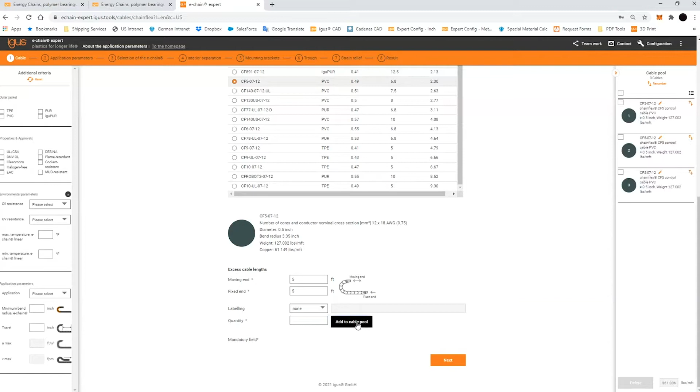So it will also ask me what the excess cable lengths are coming out of the moving end and the fixed end. So I'll say I have 5 feet coming out of each end, no special labeling, and I'll say that I have 3 of those cables, and I'll add them to the cable pool, and they'll populate over here. The next option is to select the chain flex cable if I don't know the Igus part number, but I know the electrical details I need.

So for example, I can come down here, and let's say that I need a 4 conductor by 10 gauge. So I'll click that, and it will populate a number of different Igus cables that we can use for this electrical configuration, 4 by 10 gauge. So I can pick the CF130 series, CF130 US, 140 US, CF9, CF9 UL. And it will give me some details about these different cables in terms of their bend radius factor, their diameter, their jacket material, and their price in terms of dollars per foot.

So I'm going to select a CF9. I have the same inputs here for 5 feet, 5 feet. And let's say that I have 2 of those. And I'll add those to the cable pool. The next option would be what Igus calls a ready cable, and that is a pre-connectorized cable assembly. We offer these harnessed according to a number of different drive manufacturers' standards. So we have some options here: Allen Bradley, Fanuc, Festo, Heidenhain, Siemens, a number of different manufacturers.

So for example, let's pick Siemens, and we can select from a variety of different manufacturer part numbers. So we can cross essentially any of these Siemens cable part numbers. So we'll select one here. It'll give us a little bit of detail about it: the number of cores, cross section, diameter. We have the same option here for the breakout. So we'll say 5 feet, 5 feet. It'll ask us which type of connector is desired at which end.

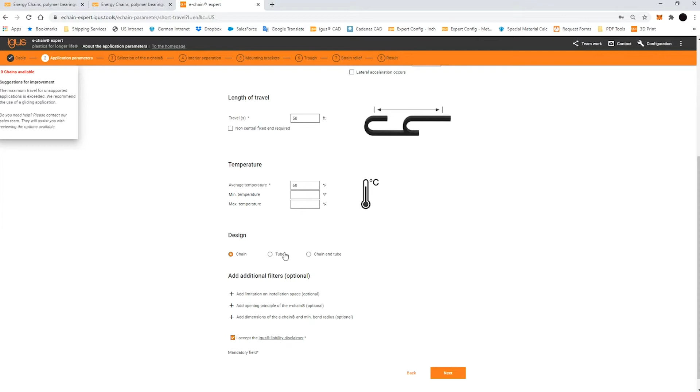And then it will ask us if we want a chain, a tube, or if we want to browse both chain and tube. So a chain refers to an open style energy chain with crossbars. A tube refers to an enclosed energy chain with lids. So if you have something that has hot chips, debris, things that you want to protect the cables from, you can select tube. Or if you want to browse both chain and tube, you can select that. For now, we're going to leave it with chain.

There's also some additional filters here that you can choose to use if you like, that will allow you to put in space restrictions. So if you have an application where you have to fit all of the cables in a chain that is, say, 6 inches wide, you can put in a 6-inch restriction for this B dimension here, and it will restrict the system to chains that are only 6 inches wide.

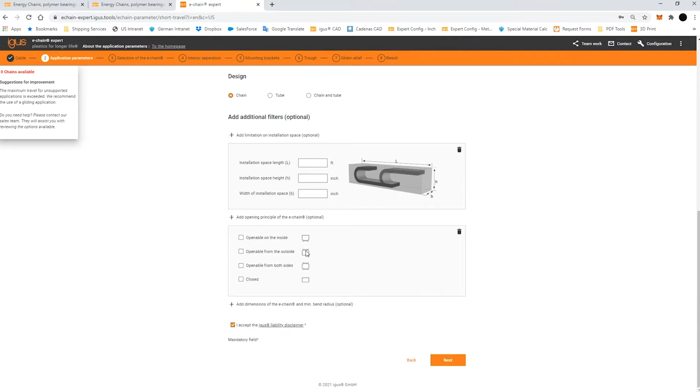You have an option here if you have a desired opening principle of the E-chain. So if you want it to open on the inside radius, the outside radius, both sides, or if you want it to be fully enclosed. And then you can also add dimensions for the E-chain itself. And these will essentially all serve to restrict the selections to just what you've selected dimensionally. I'm not going to use any of those for this example, but they're also there if you like.

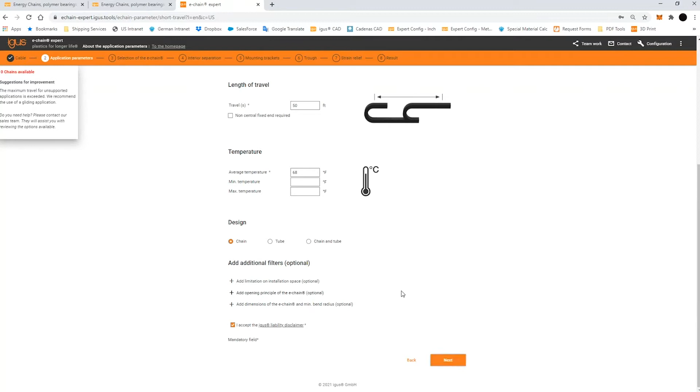So we're now good to proceed to the next option, and that just gave me an error because I was still on unsupported and not on the gliding chain. So I need to make sure I have gliding chain selected, and I should be able to move to the next step. And it will now give me a number of different energy chains that I can use for this particular application, and it will give them to me in order of size and cost.

So the smallest energy chain that we would consider recommended for this application would be the 2700 series, and it has the lowest price on the list of around $20.53 per foot. This will give us options all the way up to our largest chain, our 800 series, which has a 9-inch interior height at nearly $300 a foot. That's a far larger chain than necessary for this application, but it will essentially allow you to choose from increasingly larger chains and just cap off a minimum size. It's the smallest that we would recommend that would work for this application.

And it will also give us options down here for the service life that we would expect out of this E-chain system. So we see a number of different options here for both bending radius and interior width, interior height, and some different service life calculations in the neighborhood of 2.7 to 3 million strokes.

Now it will give me a chain service life right here. As of right now, it's not giving me a total system service life. The system service life refers to E-chain and cables, and the reason why it's not giving me a total system service life is because in step 1 I had a non-Igus hose, that pneumatic hose that I had added to the cable pool. We don't theoretically know the manufacturer's recommended lifetime on that because it's not an Igus cable.

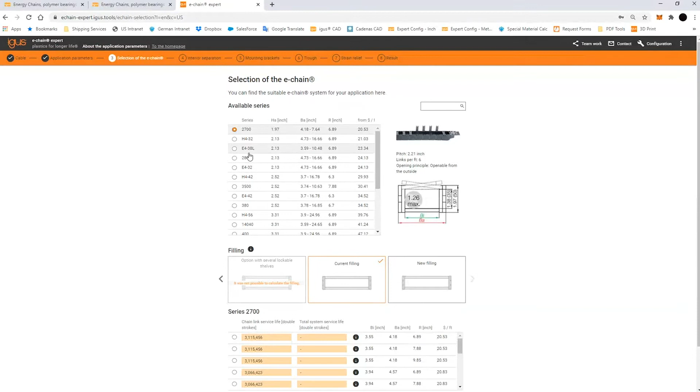But what I can do is I can also pick through, if say I see this 3 million, I say I want something with a slightly higher lifetime, I can start to go up to the next series. So let's say I want an H432 chain, we'll give it a moment, and it will populate with the values of H432. H432 is a heavier duty chain from our E4 product line. And you can see now in the E4 line, we now have a lifetime of around 9 million cycles.

So you can play with this and select different chains. I'm going to move forward with the E432. And you can see in this application, this has been able to determine an automatic cable fill for this particular cable package. So it's automatically populated us with separators. Sometimes, again, depending on the application parameters, it will give us an option with a shelf or several different configuration options that you can choose from. In this particular case, we have one automatically proposed option.

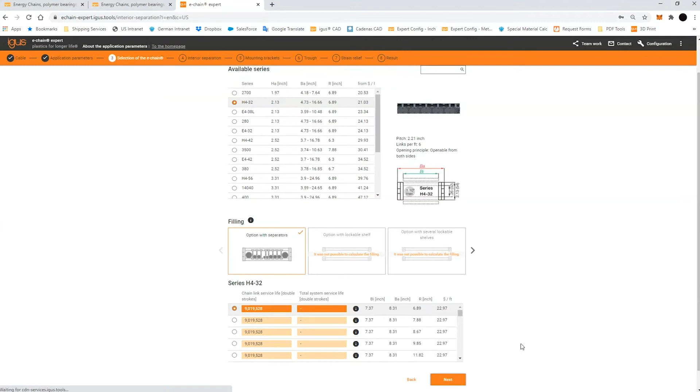And then you can also come over here, and if you say, I don't want it to be automatically filled, I want to position the cables myself, you can click the empty box and move to the next step. So I'm going to leave it on this option right now. I'll move to the next step, and you can see that it's automatically filled with all of the cables and hoses that are needed in here.

Now I do have the ability to change this if needed. If I say, hey, I don't really like the automatically prepared configuration, I need my encoder cables to be on this side of the chain, I'm able to pull things out of the chain and move them around. So I can move this encoder cable over to here, and I can come over here and grab another separator and click this and click. I can add that, grab another separator. I can use these arrows to move the cables around so that they're as close to their separator as possible.

Now you can see that the configurator does automatically include a little bit of clearance. You can see a little bit of white space between the separator and the cable. That's the Igus recommended clearance of 10% around the cable, so it will automatically calculate for that. And I can move things around as needed and hit the down arrow, pull everything down.

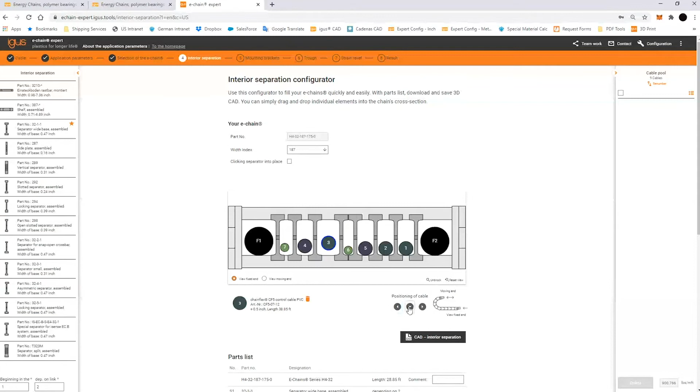If I also decide that, hey, I want to leave a little bit of spare space in here for future expansion, I can come over here and say, make my E-chain 212 millimeters instead of the 187 that it was, and I can change this width accordingly. I can move things around, I can create another compartment, and do whatever is needed to configure these cables and put them in a place where I'm happy with them.

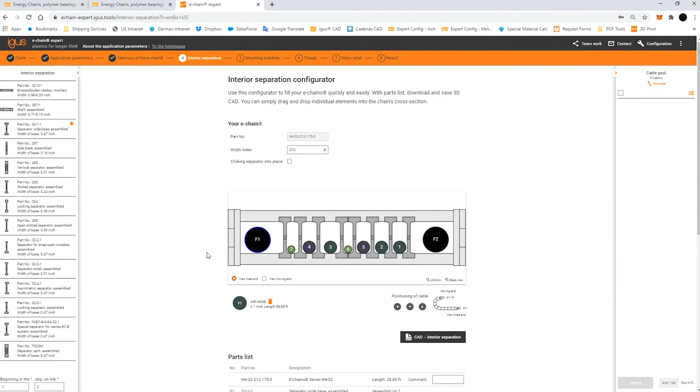So with that, once I'm happy with how the chain is configured and how the cables are placed in, there's an option here where I can kick out a CAD file of this interior separation, and I'll show that now. And there'll be another place to be able to do that further along in the tool, but I'll show it right now.

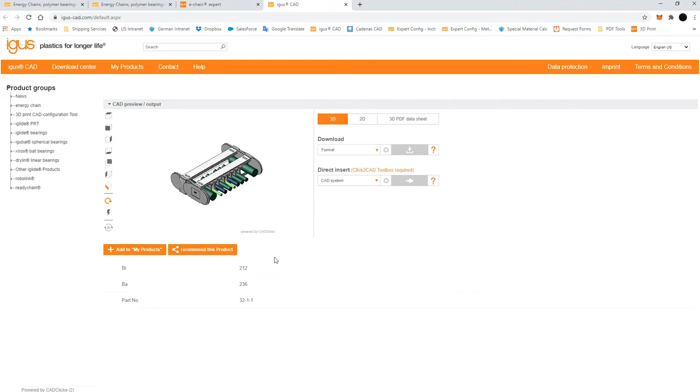It'll take a moment to load, but essentially what that will do is it'll give us a 3D file of a couple of links of the given energy chain and the cables inside of them. So that can be used to be populated into an engineering drawing or for reference of exactly what that link will look like. So as it loads here, this is essentially what the file will look like.

And you can look at it from the side, you can look at it from the corner. So essentially 2 links with the cables inside. You can download this STEP file, SolidWorks, whatever it is that you need to pull into your CAD program for drawings. So if we go back here, we're ready to move on to the next step in the configuration.

And that's going to be the mounting brackets. So this is our standard bracket set for this series. It's known as the KMA bracket style, and we offer that in a pivoting and locking configuration. So with this being a horizontal application, we recommend the pivoting brackets as indicated by the note here. The locking bracket is recommended for vertical travels, and that's indicated by that note. So this being horizontal, we'll leave it as pivoting.

And then we have an option to either include or not include a C profile, which is a metal profile rail that's integrated into the bracket that can be used for strain relief. We have a number of strain relief accessories that clip into this rail that can be used to secure the cables. So we'll go with the C profile. And the C profile can be installed in different places within the bracket.

So you can see I can click through these different configurations, and I can say I want the rails on the outside radius, I want it on the inside of the moving end, the outside of the fixed, and through the different configurations. And I can also say I want profile rails on both. So A2 is the most common configuration with the profile rail on the outside radius and the fixed end, and the inside radius and the moving end. So that's what we're going to leave it at for this example, and then I can move on.

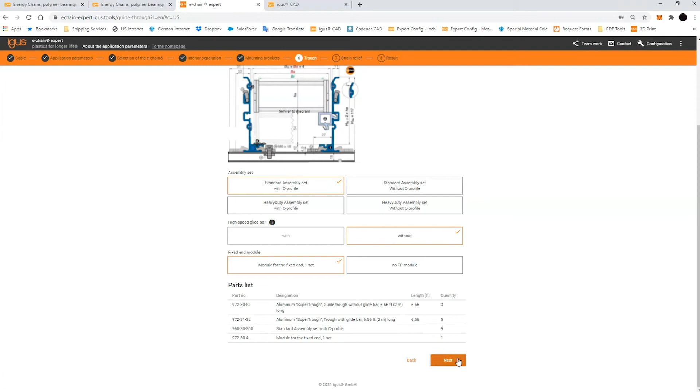And now the final step in this process is the strain relief selection. So as of right now, this is still being developed. In the future, this will be another configuration screen where you'll be able to drag and drop individual strain relief elements onto the cables that will be sized specifically for what they need. As of right now, that feature is not released yet.

It's still being developed. So this screen, as of right now, allows you to add strain relief components to your order, but it is not necessarily intelligent in selecting the strain relief components for the cable. So if you already know what strain relief components you like to use and need to add, you can add them from this list here. So we have some strain relief clamps, we have some tie wrap plates. So I'm just going to add a couple of tie wrap plates.

Let's say I need 4 of those. It'll give me a little picture of what it looks like, and I can add those to the list. Now, not overwhelmingly intelligent at the moment, but this will become something where we have a list that will show exactly what the parts and pieces are for each individual cable. As of right now, it's just an ability to add some additional parts to your shopping cart. And that will complete the configuration.

We can click next, and that will bring us to our final result. Now, assuming that all of the components that are needed in that system are within the Igus online library, it will kick out a price right there. And from this screen, you can directly add to a shopping cart or request a quotation from Igus. So click either one of these buttons. It will pull up a box to put in your information, email address, company name, and you can either order it directly or request a formal quotation or a discussion with an Igus representative.

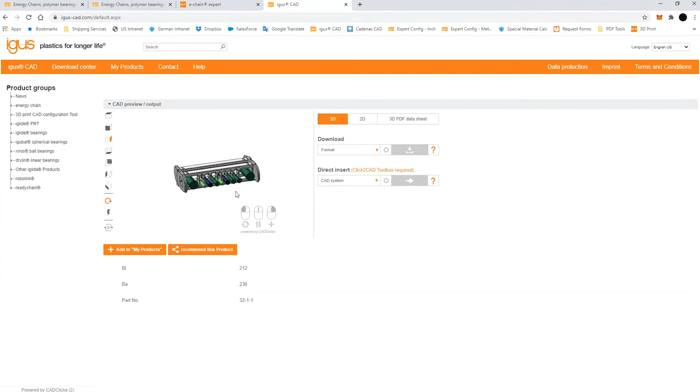We also have a couple of buttons down here that will allow you to request a sample of the chain. We have another 2 buttons for a CAD file here. So if I click this button, that will bring me right back to the same file I had shown previously. It's just another opportunity to generate this internal separation configuration. And then I can click CAD of the E-Chain itself, and this will give me the larger file of the overall E-Chain system. It will take a short moment to generate, but this will essentially be the entire gliding chain in the loop with its travel extremes.

So here we go. Now we have a 3D model that we can download of the chain and its gliding configuration. And for anyone who's familiar with the Igus CAD site, we have options here, and you can change certain attributes of this. You can change the positioning of it. You can add and remove brackets. You can do different things to manipulate the file as you need it to be.

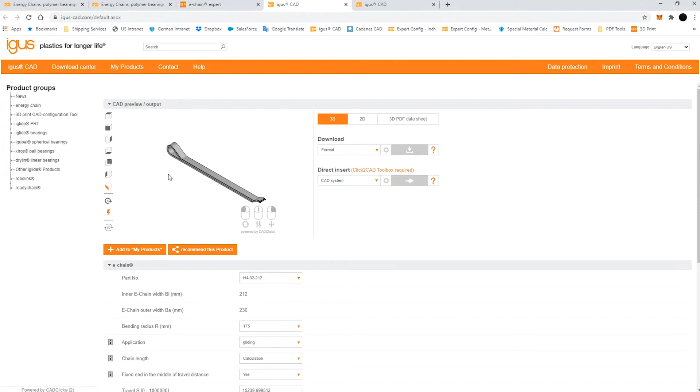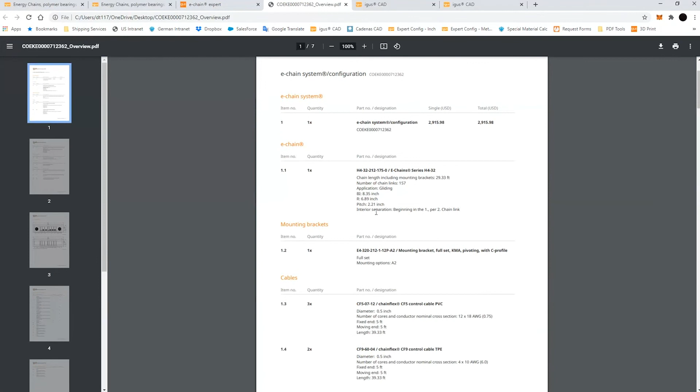If we go back over here, we have an option to download the configuration and parts list as a PDF file. So we'll click on that, and it will load momentarily, and it will bring up a dialog box to download a configuration. So if we save this and open it up, it will give us a PDF output of what we just did. So it will give us the parts list and a sketch of what it is that we configured. So this can also be used for documentation purposes and engineering submittal. This is another link to generate a similar drawing and parts list, just in a different format.

This option right here allows us to link to the Igus webpage for the given energy chain that we had selected. So we had selected the H4-32, so we can read more about it, read about some accessories, some different options, essentially the general product page on the chosen energy chain.

And then the last option is a save configuration button. So you can click this and you'll download a file essentially of all the work that's been done in this configuration. If you have done all this work but you're not quite ready to order, or it's a preliminary project, you can download that configuration, and that will allow you to load it back up and work on it at a later date. You can also send it over to an Igus guy.

If you're working with your Igus representative, you can send this to him and he can open this up, and essentially you can pass work back and forth by downloading the configuration, saving it into a file, and then passing it back and forth, or restarting it in a later session. So that is essentially the start to finish on the configuration based on application parameters. So the other option will be if I already know the energy chain.

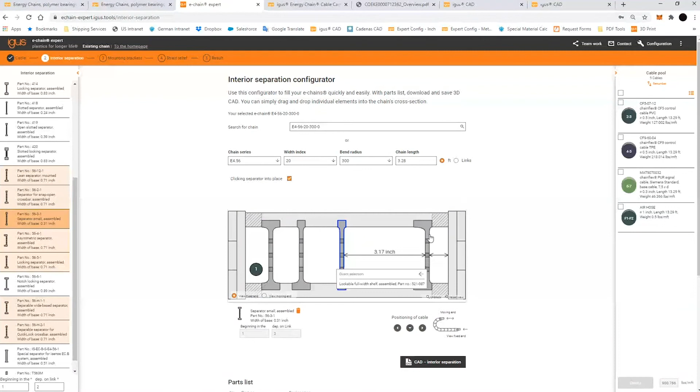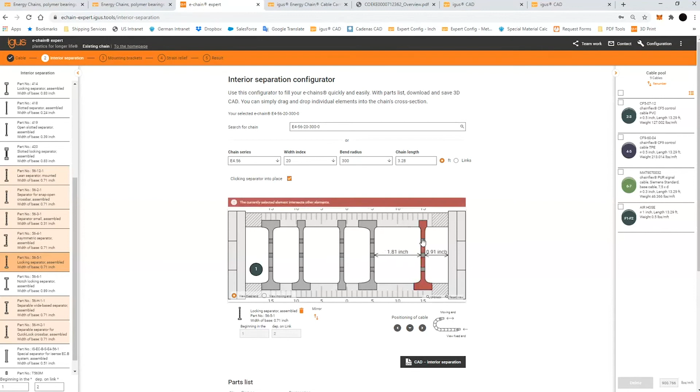So I have a similar style separator that has a narrow top, one that's narrow top and bottom. I have one that's asymmetrical that will be wider on one side and narrower on the other. I have an option that will lock into divisions on the crossbar. So if I don't want this separator to move, you can see that a scale pops up on the top, and this will essentially increment in given indentations, whereas this style can move. If I uncheck the click into place, this style can essentially move freely all the way across. So I'll pull those out.

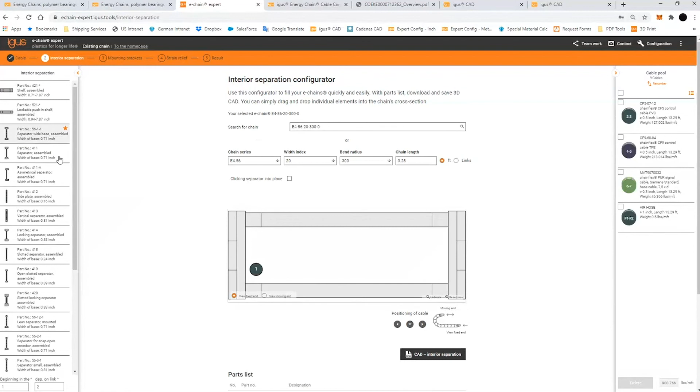And then I'll show that for the alternate generation of separators, if you're a customer who prefers the older style generation, such as these right here, I can pull and drop a side plate in, and then it will in the same way highlight the components that fit with this. So I can pull this in right here.

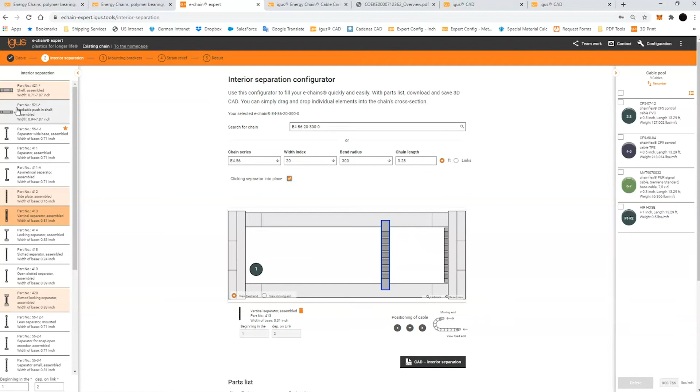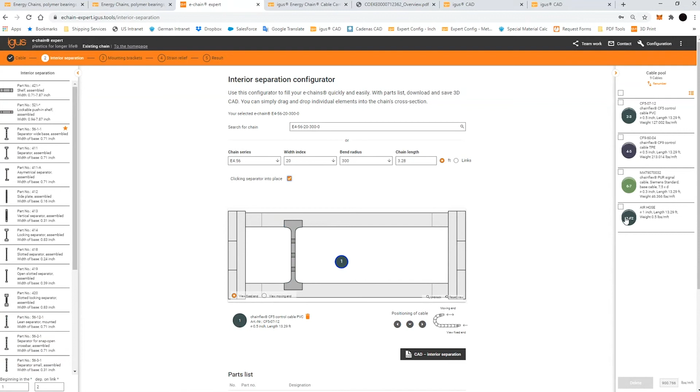I can click separator into place if I want to use a shelf, and it will tell me what size shelves I can use, and then I can come up here and I can grab a shelf and drop it in. You can pull that shelf out and I can click it a little farther over and it will set to, again, an available width of shelf. You can play around with that and make this look the way that I want it to. So I'll pull in an air hose, pull in another air hose.

And what will happen here is that you'll see that this air hose is black, it's a solid color. These two are light colored, and if I click here, you'll see they're highlighted in red. And if I click on one of the ones that's highlighted in red, it will give me an error message. So essentially it's telling me that we don't like to see these two cables and hoses in here without any separation, because this cable can roll over, it can cause tangling and problems over the lifetime.

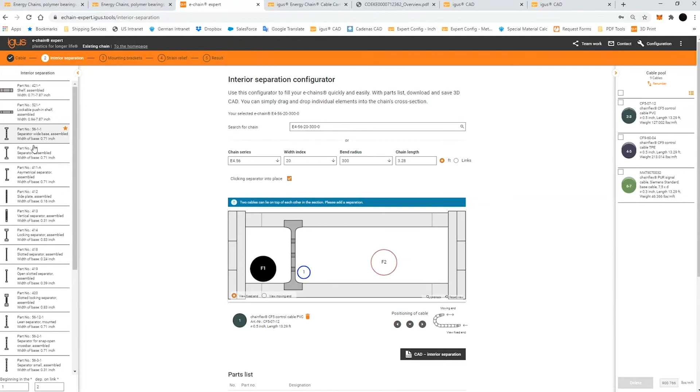So it's going to give me an error until I pull in the separator and essentially constrain these two so that one can't cross over the other. And now we're good to go, and both are fully constrained. And then we can also change bend radii. Right now we're on a 300 millimeter bend radius, which is a very safe bend radius that will be kind to all of these cables.

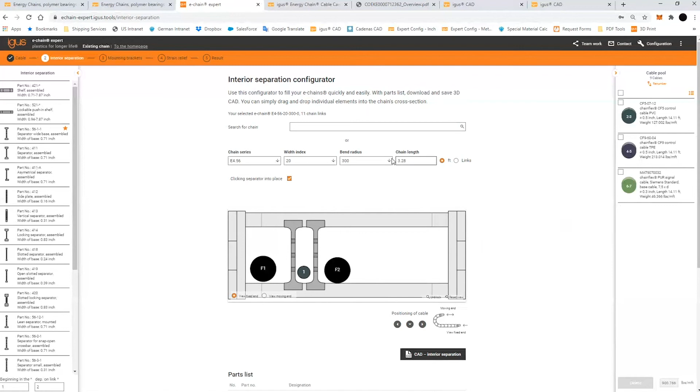So I need to try and shrink it down, and I select 135 millimeter bend radius. What will happen here is that these will now be highlighted in red, and the reason for that is because the bend radius of the chain is too small. So it will identify the fact that I put in a 6-inch bend radius when I created this hose, and now the bend radius field is too small for the rating of that hose. So I can come back over here, change it back to 300, and we'll be okay.

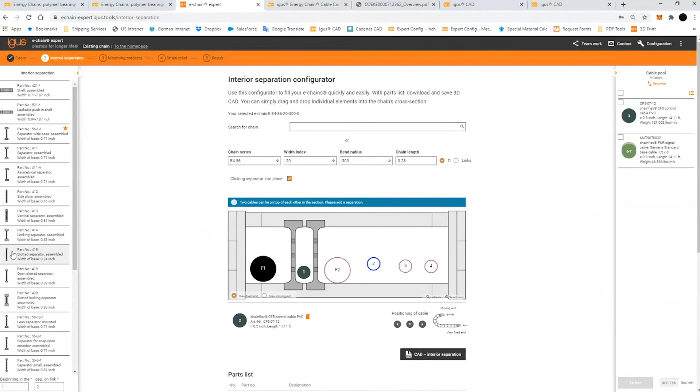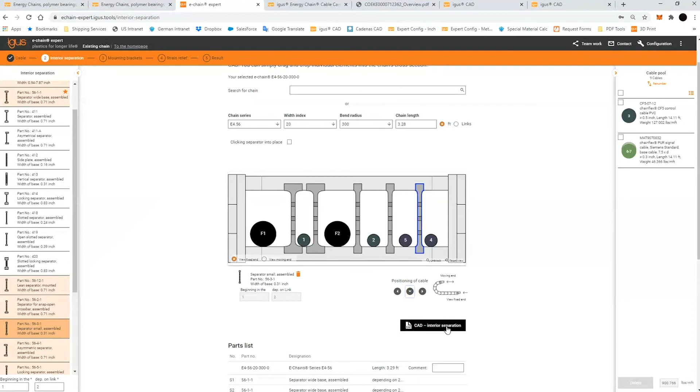And I can pull in some additional cables here, and I can start to add additional separators. So I'll use a narrow one here, and I'll click this off so I can slide it. I can slide around, and I'll use another couple of these narrow ones. So I can really configure the chain however I like, and then I can use the arrows, pull everything down. I have the same options here for the CAD file of the interior separations, and then click along. And these remaining screens will be the same as what we've already walked through.

So we have the bracket selection, and then we have the strain relief selection, and then we get to the result. So again, we have a price, we can add to the shopping cart, request a quotation, and download all of the same options. So two different ways that the tool can be used: if you either know the energy chain you're going to use, or if you want the tool to suggest a specific energy chain based on the lifetime.

Now that the Igus energy chain has been configured, it's able to be purchased. You saw in the first route through, there was some lifetime calculation data. So a relatively new thing that Igus is offering is that lifetime calculation is now fully guaranteed by Igus for up to 36 months. So I'm going to pop back over to the slideshow here, and I have a short video to play of the Igus test lab.

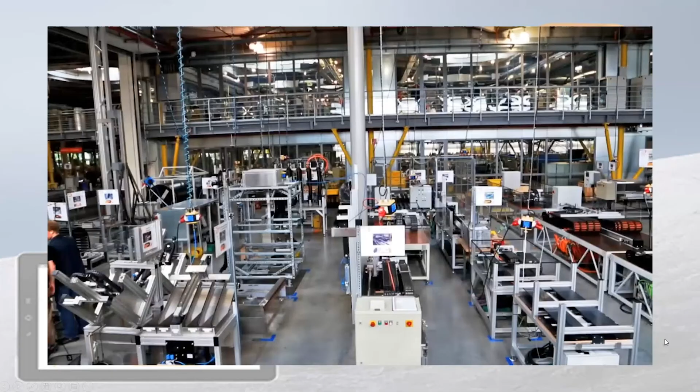So Igus operates by and large the largest test lab in the cable management industry, the cable carrier industry, and we conduct an incredible amount of tests every year, and we convert those test results into data that we feed into our lifetime calculator, which allows us to predict with a high degree of certainty the minimum lifetime of a cable carrier. So I'll play the video here, and this test lab is located at Igus headquarters in Cologne, Germany. It's a 41,000 square foot test lab, and there'll be some statistics shown about it.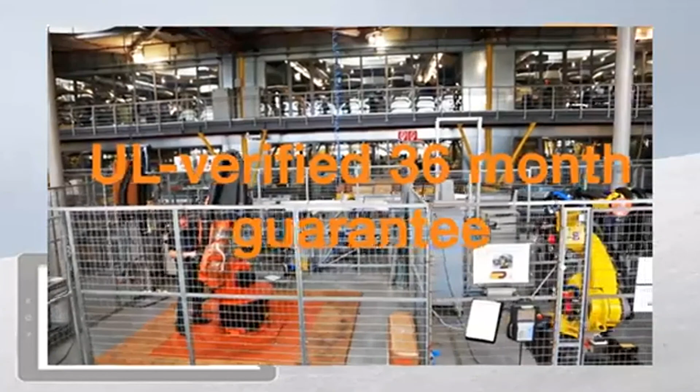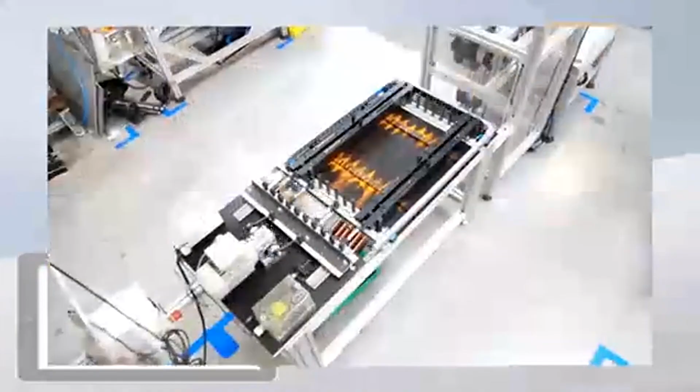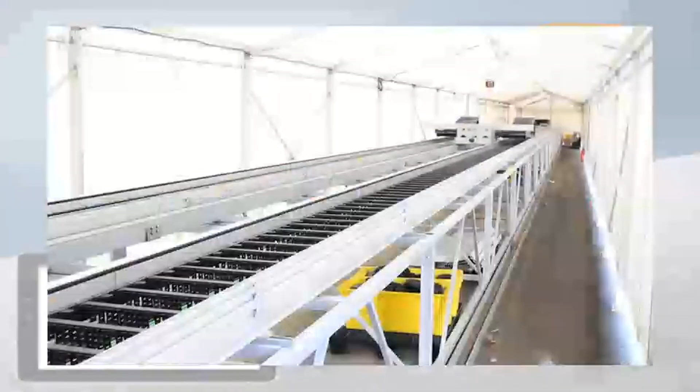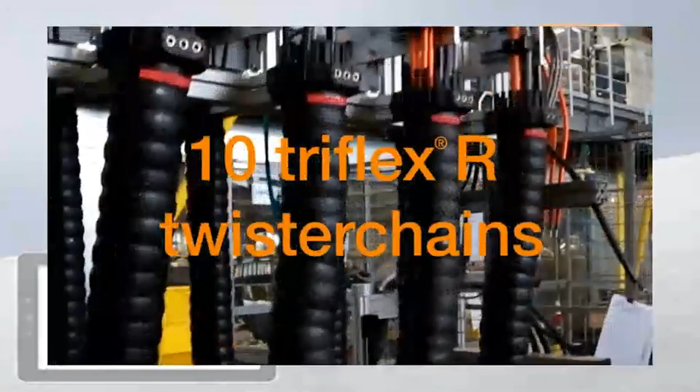You'll see all the different types of test machines that we have: robots, linear travels, rotational travels. So all these machines move back and forth. They're Igus energy chains filled with Igus cables, so we're testing both our cables and our cable carriers simultaneously. And we're able to gather a huge amount of data from these tests, so we can reliably predict the lifetime of really any Igus cable or Igus cable carrier in a wide variety of applications. This is one of our larger test machines that we use to test the long crane type systems. We have robots that test our robotic systems. Some more long travel systems, high-speed systems.

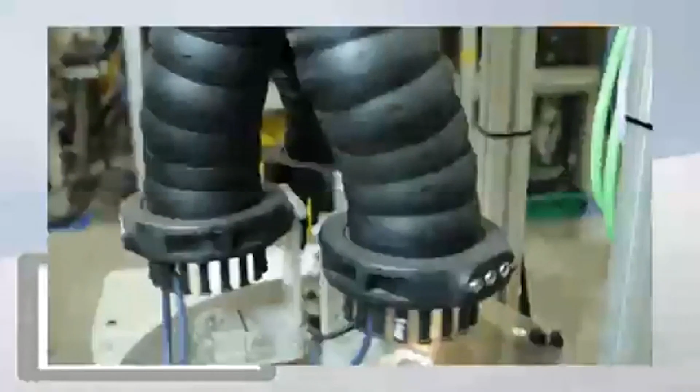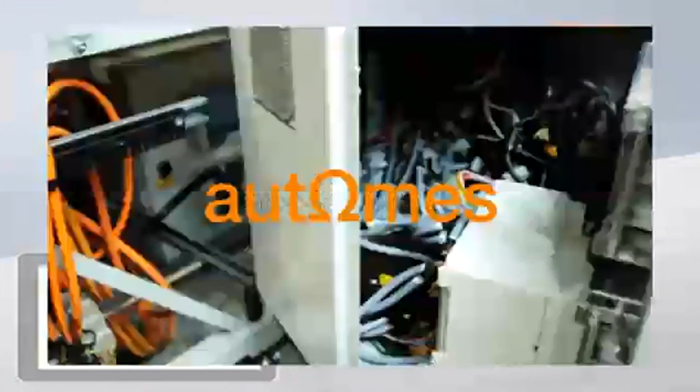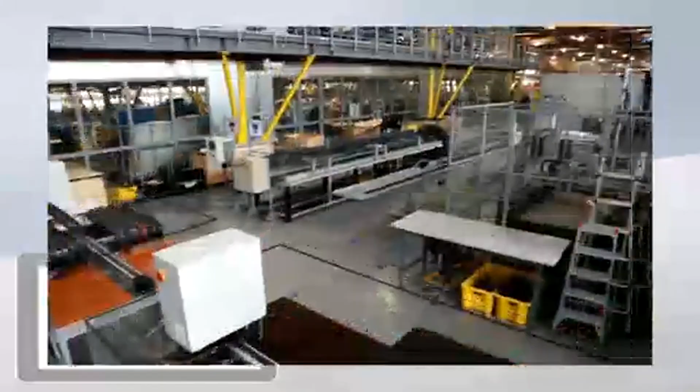Some of our multi-axis chains. Twister band, which is a specialized rotational movement, rotational product. Some of our testing software that we use. These are some special tests that are set up in unique motions for specific customer applications. We have a cold chamber to test things at very low temperatures.

So from all this data, we're able to create a lifetime calculator. And now that lifetime calculator is able to put forth a guaranteed lifetime for a given energy chain system. So again, we will jump back over to the Igus website. Hopefully you guys all still might have my screen. Stop me if you don't.

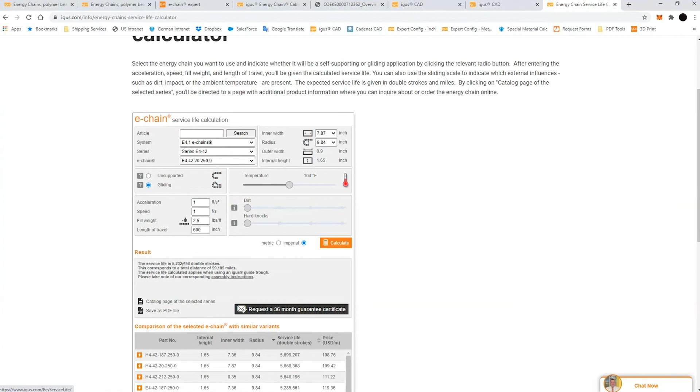Say it has an acceleration of 1 foot per second squared. Say it has a speed of 1 foot per second. Say it has a fill weight of 2.5 pounds per foot. We'll say it has a travel distance of 50 feet or 600 inches. And we can then say calculate, and it will calculate for us that this given energy chain has a lifetime of 5.2 million strokes, double strokes, that's there and back.

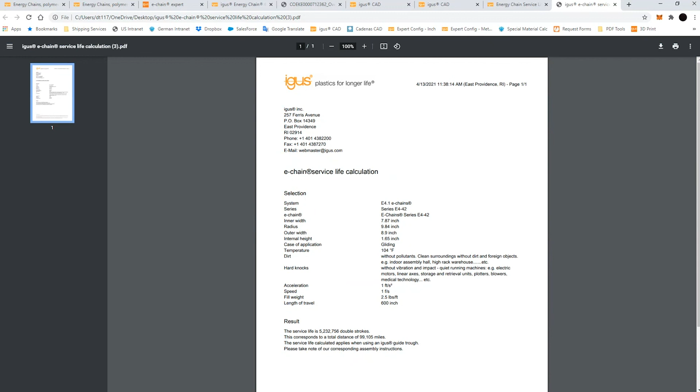So then we have a couple of options down here. We have the option for a catalog page of the given series. We can save this as a PDF file. So if I click on this here, it'll give me the option to download a PDF file, and this will open this, which is essentially just the documentation of what we just calculated. This does not go to Igus. This is just essentially a static printout of the calculator, which you can save for your own records.

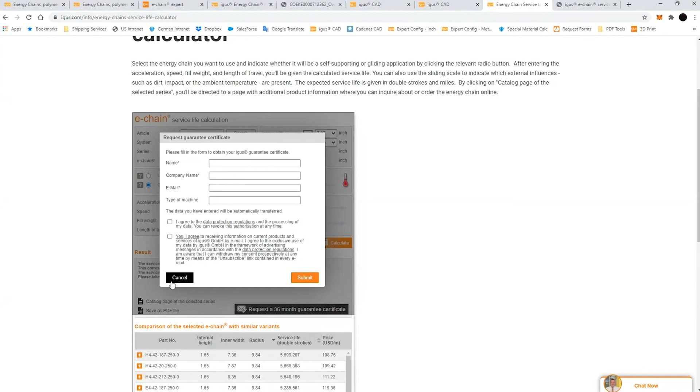But what we have over here is the ability to request a 36-month guarantee certificate. So if I request this, I can type in my name, my company, my email address, the type of machine, and agree to the regulations, and click submit. And that will send an email both to you and to Igus with the details of this calculation. So I've done that previously, and this is what the email looks like.

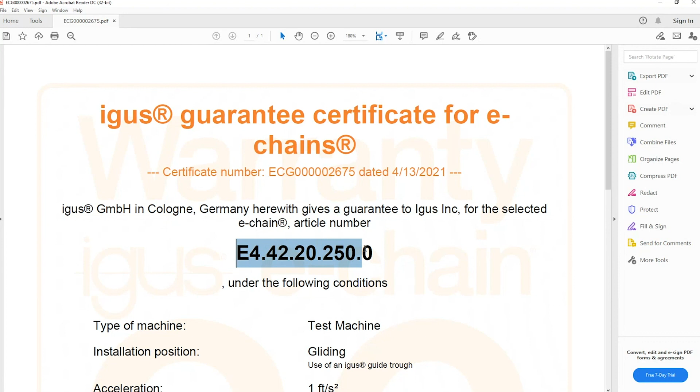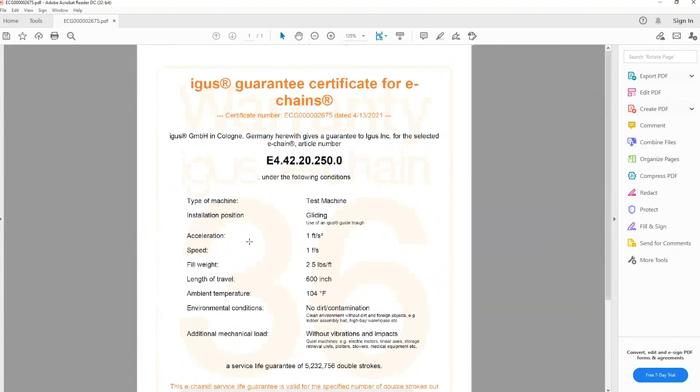So it says, thank you for using the Igus service life calculation. Enclosed, you'll find your guarantee certificate. So if I open the attachment here, I get a certificate that looks like this, that will say that Igus guarantees the given E-chain for 36 months. This particular energy chain, under these conditions, it has the name of the machine, it's a gliding application, and these are the same parameters that we put in. And it says the service life guarantee of 5.2 million double strokes.

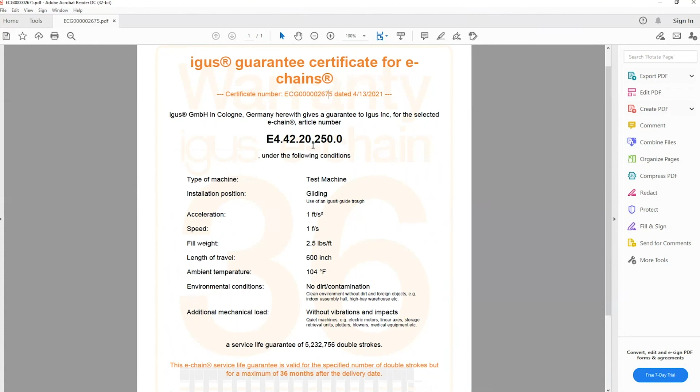Service life guarantee is valid for the specified number of strokes or up to 36 months after the delivery date of that system. So a copy of this will be emailed to you, and a copy of it will also be stored in the Igus database, so that if ever you do need to make a claim, you can reference your warranty certificate number that's listed up here, and that will allow traceability back to the Igus warranty system. And as stated down below, in the event of a valid warranty claim, Igus will offer a complete full replacement of all of the material that experiences the problem.

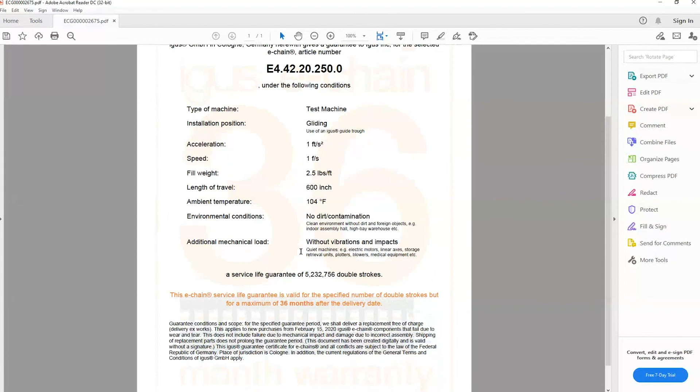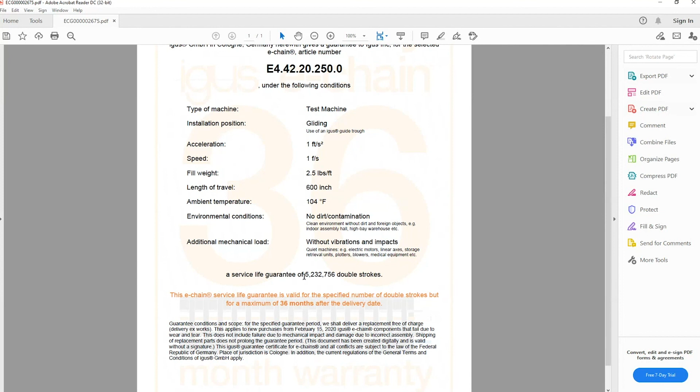Obviously, we don't expect our systems to really ever need this warranty. Because of all of the testing that we do, we're extremely confident in the lifetime numbers that we put forth. But it can be helpful if you're a new customer of Igus and need some confidence to stand behind this technology, or maybe you're using an alternate system like a festoon or a cable reel, and you need some backup as to how long the system is going to last. Is it guaranteed? Now Igus is willing to give you a guarantee certificate to confirm it will hit a minimum lifetime, and if it doesn't, we will reimburse you with a complete replacement product.

So that is pretty much the gist for today's webinar for the configuration tool and the guarantee program.